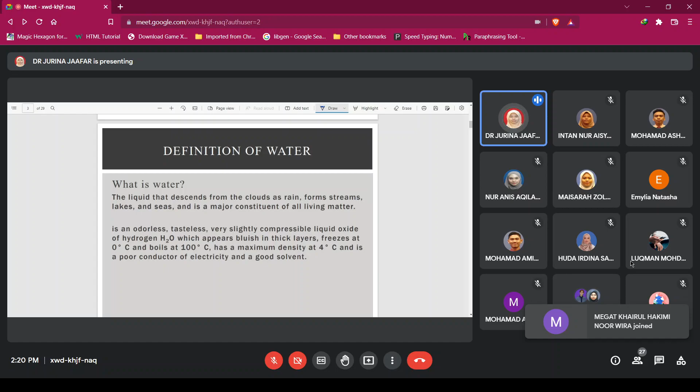What's the difference between water and wastewater? So what is wastewater? After it has been used, we call the water wastewater, because it has been used by humans. Wastewater can come from domestic, industry, commercial, or any agricultural activities.

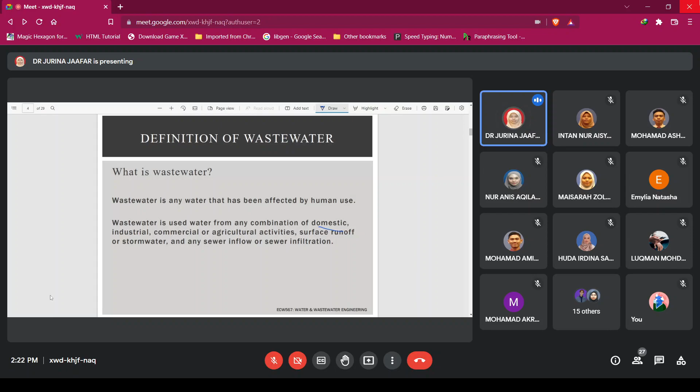Here, what is engineering? Why do we need to study water and wastewater, and why does it have to be in the engineering field? As we know, engineering consists of art or science of making practical applications. We involve a lot of hands-on practicals. That's why an engineer is not like in a drama.

Engineers are actually quite hardworking. Because we need to be on-site, we work very hard, it can be messy. So engineers might seem like they're not that smart, but they are smart in terms of the mind and the knowledge.

But practically we have to be on-site. We have knowledge of pure sciences and we are good in physics and chemistry. We have many engineers out there doing construction work related to bridges and buildings. Some of us are involved with chemical plants and similar things, but we are still under the engineering umbrella.

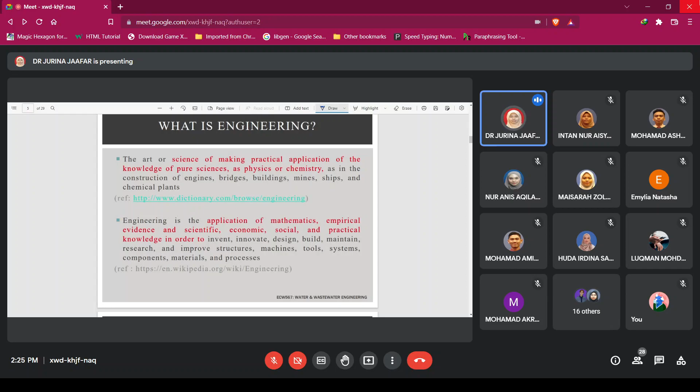Then, what is water and wastewater engineering? We combine the water and wastewater field with engineering. So we apply a lot of maths and evidence on the practical side, the empirical side, the scientific side. We also relate to the economy, the social aspect, and all those particles in water and wastewater.

So we look at what's actually in our environment. We're more concerned about pollution, pollution that comes from water, either from the origin or sources of water, and pollution that can come from wastewater. So we look at what triggers the pollution, we look at the sources. Here are the four keywords we always use in this course: to be able to remove the pollutant, to reduce the pollution, to prevent it, and to control it. As engineers, these are the four bases we need to have. We need to know how to remove, reduce, prevent, and control. That is our main job here.

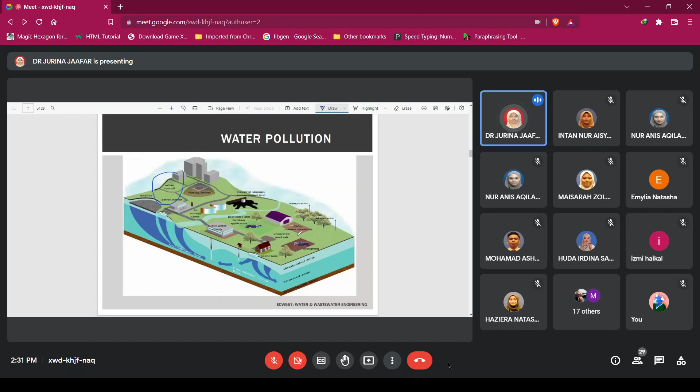As we can see here, there are many sources of pollution. We have sources that come from landfills, then from urban runoff when water comes from rain and moves on the surface. On the surface, we have urban runoff flowing at urban areas, then going to the lake. Then we have leaking sewers, and pollution from petrol stations, from oil and gas. Then we have industrial storage, contaminated land, oil spills. Then from farms, we have pesticide and fertilizer application. We have public water supply, and farming activities with manure spreading related to animals. Then we have uncovered roads, salts, and septic tanks. All of these are sources of pollution.

Here, you can see in this picture we have houses nearby. This is the source of water, water that comes from the river. Then you can see for the water supply, the water itself is polluted. So how do we as engineers remove and reduce it - that's where the keywords come in. This is the problem, a very complex problem. So how are we going to manage, control, and reduce it, in order to provide safe and clean water for drinking? These are the issues you can see here regarding water pollution.

As I told you, we have atmospheric deposition that comes from the atmosphere itself, the rain. We also have industrial outfall that creates pollution. These farming activities that use pesticide and fertilizer increase the potential of contamination by nitrate and nitrogen substances like phosphorus fertilizer. This brings contamination into the water.

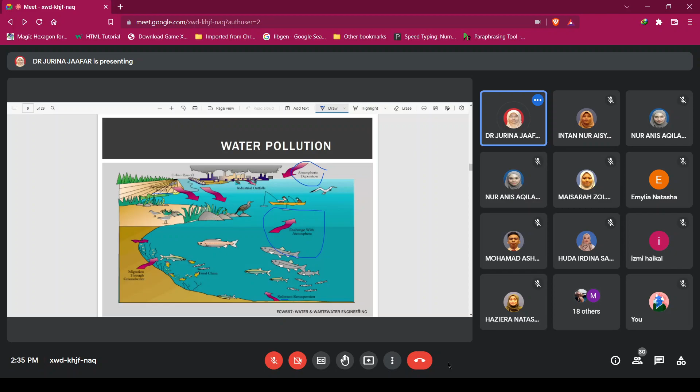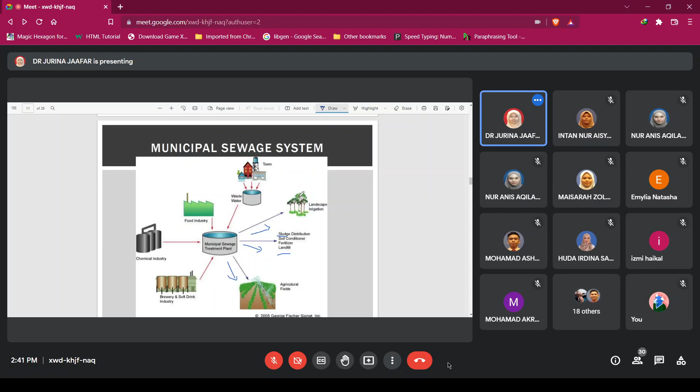And some of the water we take to use for watering the plants, watering the landscape area. We water the landscape with wastewater.

Okay, for this week, when we look at the regulation, the standard, so we have an act, we have limits, then we know about the pollution and its properties and effects. Can you all hear?

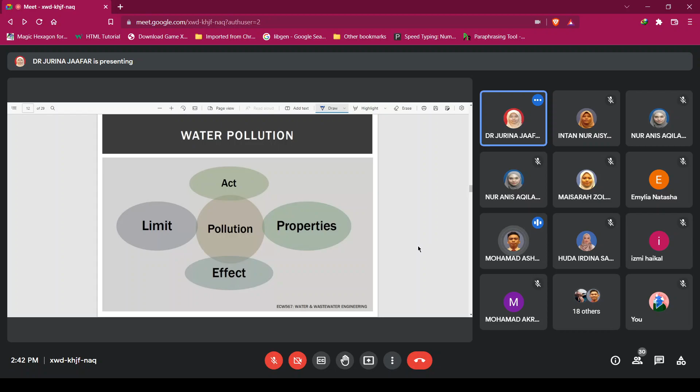So here is what you can see, these are the issues every country faces. We really cannot avoid pollution; no water source is free from pollution risk. That's the challenge for engineers, that we always have to look at development. The country needs massive development for the economy and so on, but still we need water, we need a water supply.

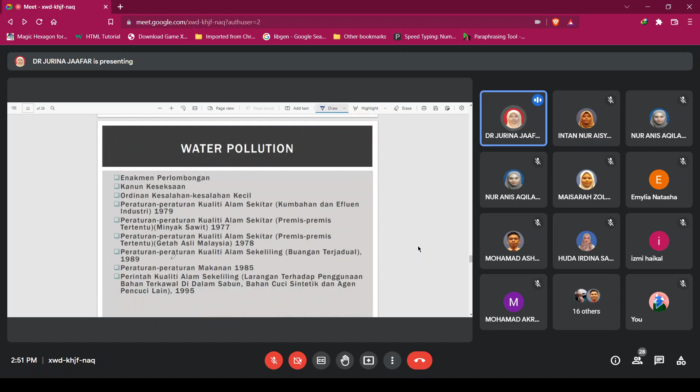Many of the acts, enactments, and regulations are scattered clearly across the years, along with the scope and topic of the things they describe - the standards. What you can see here is clearly stated - the main concern for each standard is written, referring to the things important in our environment.

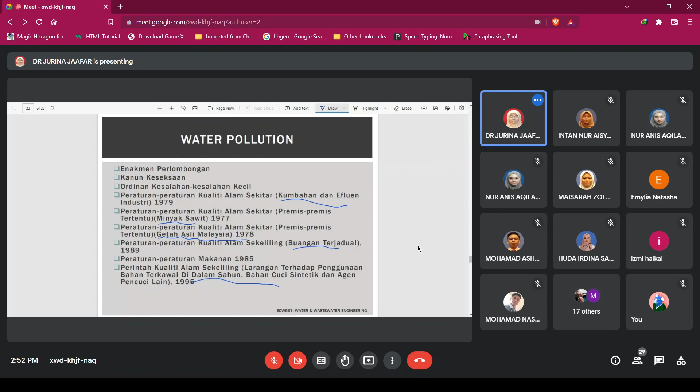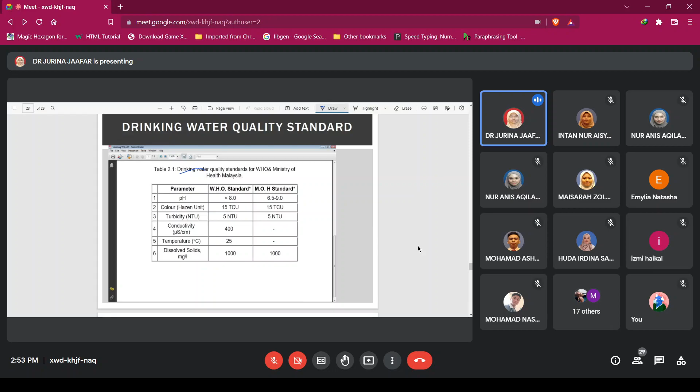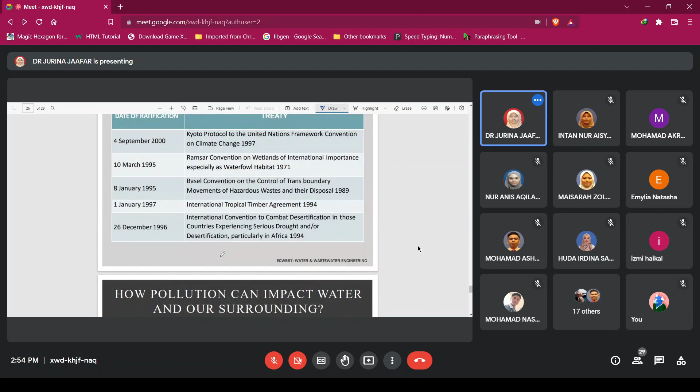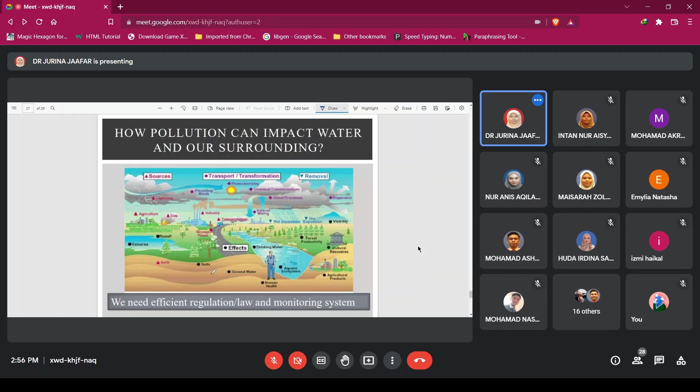So what's the impact? It will cause human health problems. It will also cause a problem in the environment, the quality of the air, and so forth.

You can make a story here. Why do we need a law, why do we need guidelines? Of course, to protect human beings and our health. So how does pollution affect our health? Not only from water pollution but also air pollution.

If both of these happen, it's quite bad. So here you can see a lot of impacts, how it can affect human health. So does anyone have questions from slide 1?

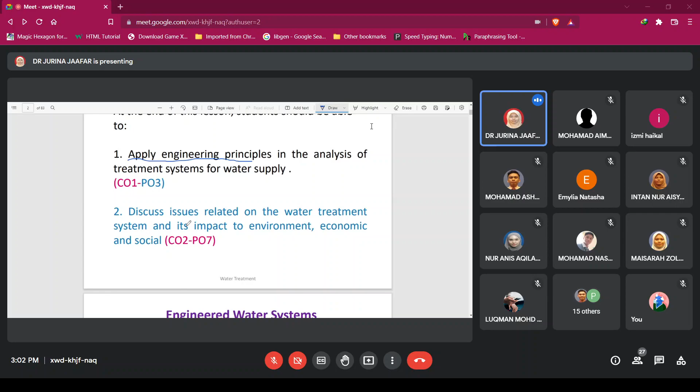The second learning outcome looks at issues related to water treatment systems and their impact on environment, economic and social aspects. There are two main parts to this learning outcome. The keywords are that this will involve calculation, and the other part will involve theory. So there are two parts: one calculation, one theory.

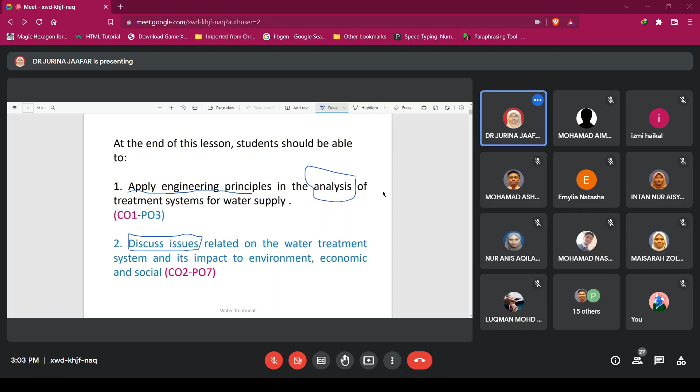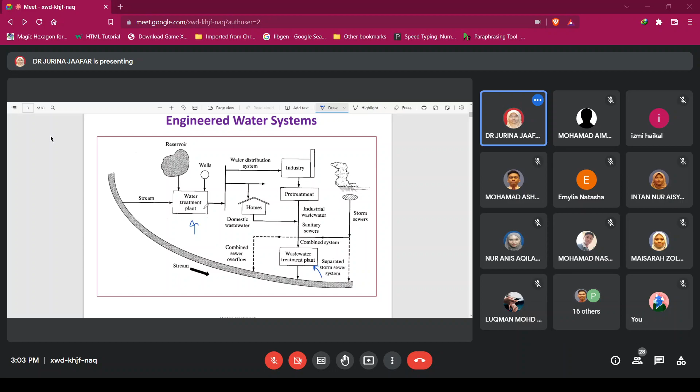So I went through what we will learn in ECW 567. We will learn about water treatment plants and also wastewater treatment plants. So this is basically an overview of what we will learn in ECW 567.

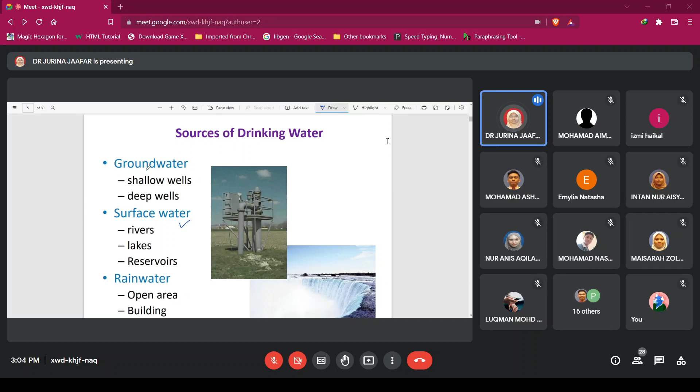Where does the water come from? In Malaysia, we rely mainly on surface water, so we have sources of water that come from rivers, lakes or reservoirs. For groundwater, some countries rely on groundwater, having deep wells and shallow wells. Some countries depend on rainwater, collecting it at open areas or at the top of buildings, to avoid contamination. They place storage at buildings so they collect only rainwater, to avoid contamination. Sometimes they place storage in open areas so they avoid the consequences of pollution.

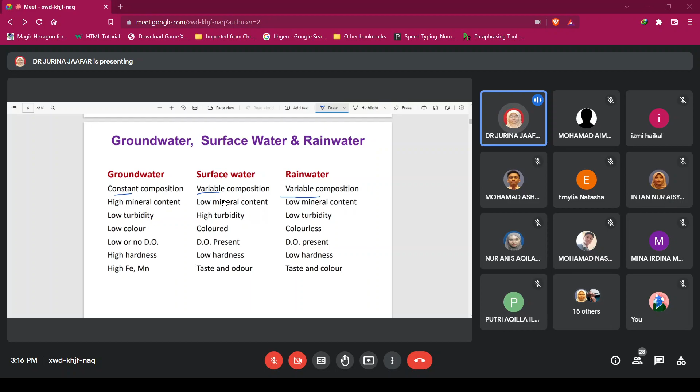Okay, so on water quality, we always use these four terms. As an engineer, we describe water quality using these terms: physical, chemical, microbiological, and radiological. This is the terminology we use to describe drinking water quality.

The first is physical. When we relate the quality of water for domestic use, we look at it physically - we see it, smell it, touch it using our senses, that's why we call it physical. So we describe water in terms of color, turbidity, temperature, and taste - what you smell. That's the physical term.

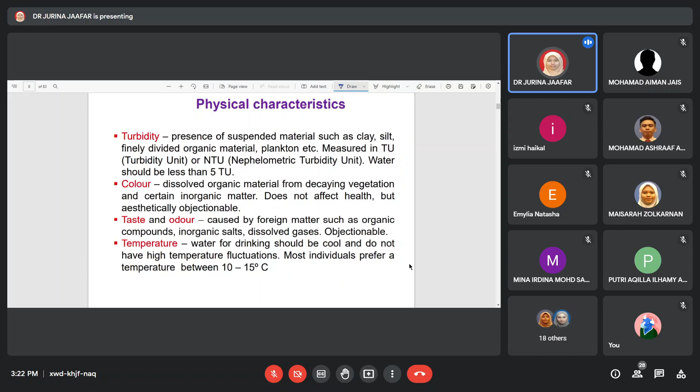Color can come from dissolved organic material from decaying vegetation, or inorganic matter like silt and sand. It doesn't affect health, but we don't want it - we don't want water to have color. Taste and smell can come from inorganic salts, minerals, dissolved gases, or any foreign organic compounds - we don't want these in water. We check taste and smell, and temperature should be around 10 to 15 degrees to ensure good water quality.

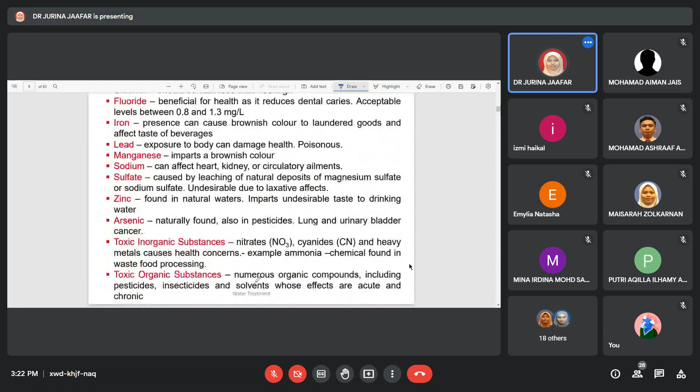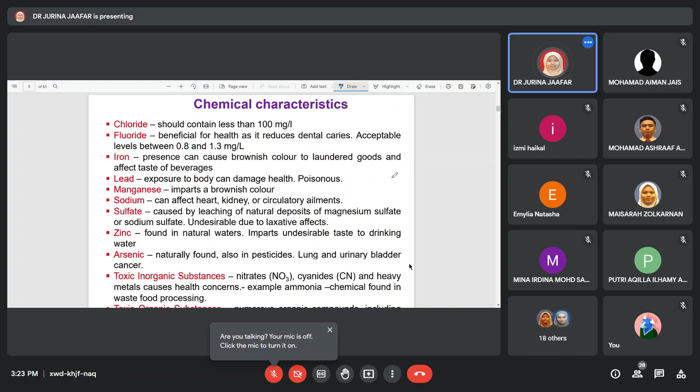For chemical characteristics, we look at fluoride - we use it every day in toothpaste - and there's an acceptable range. Then iron, which can give a brownish color during laundry. Then lead, which sometimes from minerals can damage health. Manganese, sodium, sulfate - these are all naturally occurring minerals, but only an allowable amount, not excessive.

And zinc found in natural waters, arsenic which is dangerous - naturally found, but excessive amounts can be harmful, and arsenic is sometimes found in pesticides. Toxic inorganic substances like nitrate come from pesticides and fertilizer, which can also damage health. Example: ammonia, a chemical found in food processing waste. The last one is toxic organic substances coming from pesticides, insecticides, solvents, and so on.

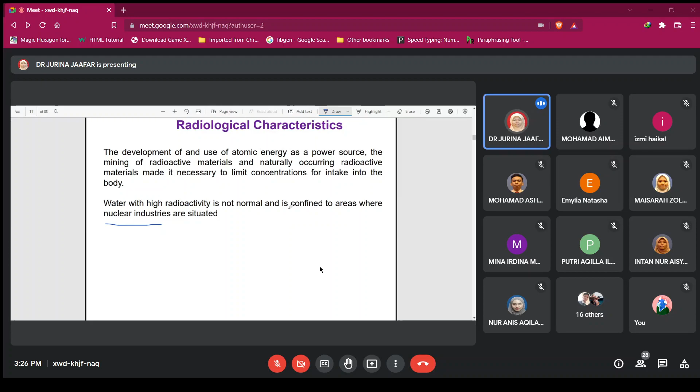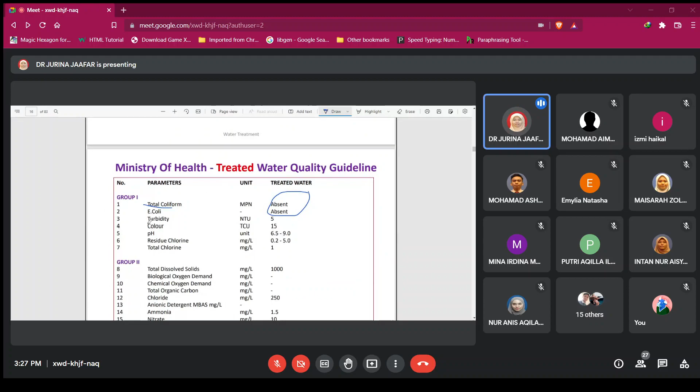We also go into groups up to group 4 - group 1, group 2, 3 and 4.

So here we look at the coliform content. This will be included in this topic later.

The water quality standard in the US is not so much different from ours, but the difference is the source of water intake. Here in Malaysia we use surface water, but some other countries use groundwater sources. That's why the water quality standard might differ a little due to the water source.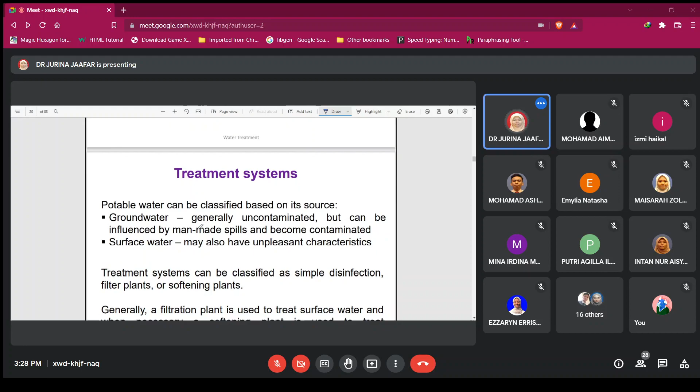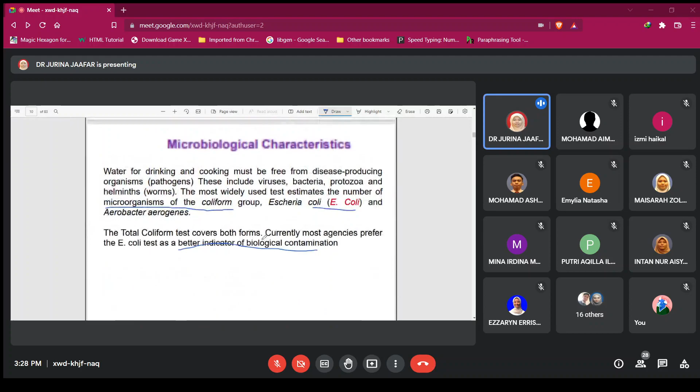Okay, I think I can stop here. We can continue tomorrow with the treatment system. Today we looked at the introduction to our course and what will be in the water - the parameters we look at are physical, chemical, microbiological and radiological. So we stop here and continue with treatment tomorrow, insyaAllah.